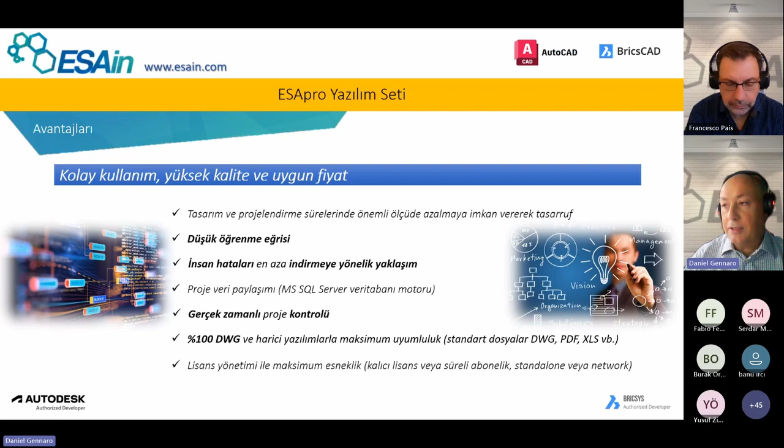I hand over the presentation now to Francesco, who will explain the connection between the different applications and what we are doing with the different applications.

Okay, thank you, Daniel. With this slide, we have an overview of the ESA Pro workflow. Here you can see all the 11 modules that ESAIn is currently providing. In the middle, you have the project database.

That is a Microsoft SQL database. We use Microsoft SQL as the standard engine, so ESA Pro is a good solution also for group work. If you work in a team of 20 or more people, you don't have problems sharing your data. All the modules are divided into three main areas: the process area, the plant design area, and the electrical area.

You start from the P&ID. With the P&ID module, you can create smart P&IDs. By smart P&IDs, I mainly mean a P&ID that is able to generate lists. From the P&ID, you can get the lines list, the equipment list, the valve list, and the instruments list.

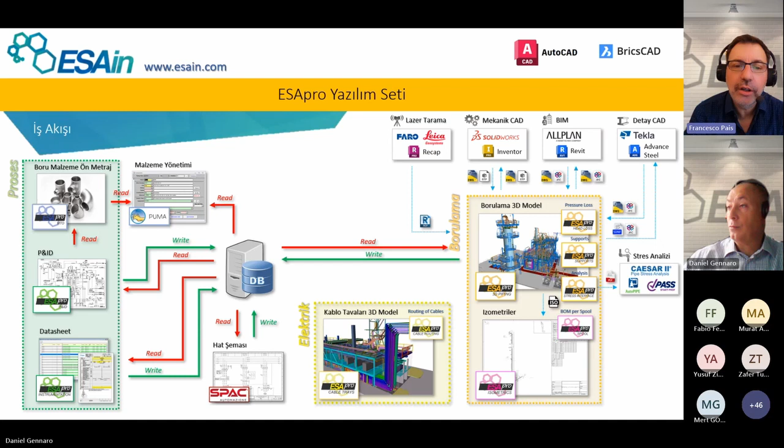ESAPro Cable Tray is a separate module that lets you draw the electrical raceways, so it can be used even if you don't have the piping. If you use AVEVA or CADWorx or AutoCAD Plant, why not? You can open the 3D model and draw the cable trays inside it. You have some default catalogs that can be customized by you easily to add, for example, Turkish manufacturers. We have some international manufacturers, but we can't have the manufacturers of the entire world. But it's easy to customize. At the end, you get the bill of materials, how many cable trays, how many covers and clips, and so on.

We also have an additional module, ESAPro Cable Routing, that lets you read an Excel file with a cables list. It may be a list of cables you want to route with the cable section, the start and the end, and so on. The cable routing module lets you automatically route your cables inside the electrical raceways. At the end, you get a list of how many cables you routed, how many cables you have to buy, and it's very efficient.

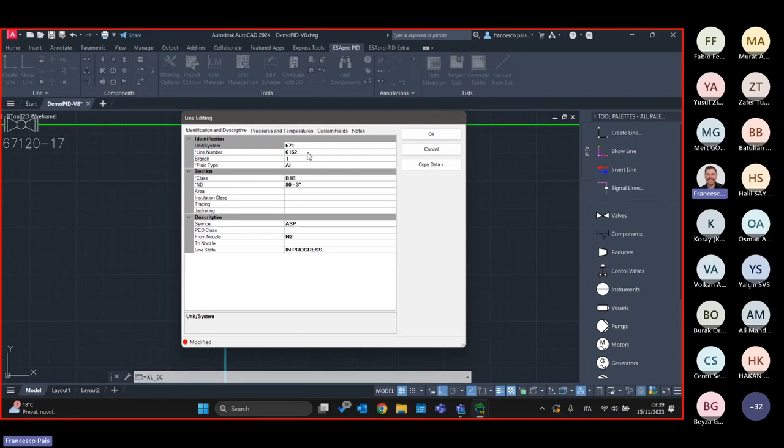And as I told you, these are standard AutoCAD entities. This is a block reference, and this is a line. If you pick this and check properties, you see the standard AutoCAD properties, and the same is for this line. But if you double click on it, you get the line's properties, because this is not just a green line - it's actually a process line with pressures, temperatures, line number, piping spec, size, and so on.

And the same is this - no, this is a ball valve. The size is 3 inches, and I will show you how to fit this information.

When you're finished, you can save your file just to have the file saved. But most important is the data extraction command. With this command, you are publishing your information into the network server, and it's shared with the other modules.

When you change something here, you see the changes in 3D piping. If you change something in piping, you see the changes here. I will show this, okay? But the workflow is this: data extraction is the green arrow you see during the presentation.

Okay, that's fine. And once done, you can generate your tables, maybe the lines list or the valves list. In this case, I'm just generating AutoCAD tables inside the drawing, but all these lists can also be generated as Excel files without problems.

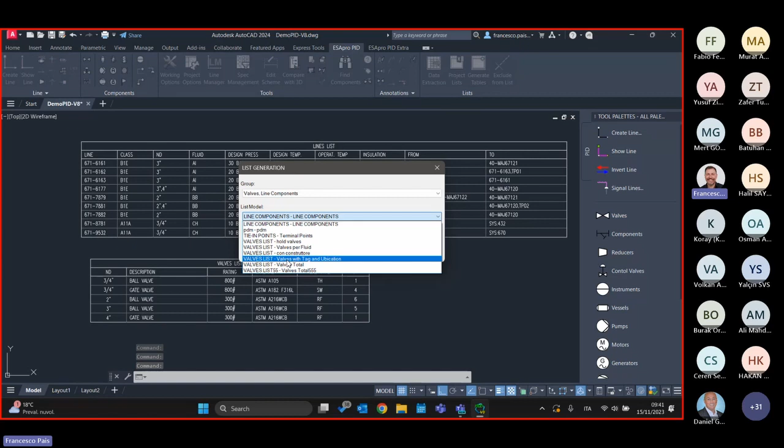It's very, very easy to customize the environment. So if you need to generate this, you can start from here, adding the tag and removing the quantity, and add the ubication. You get this.

And you get also the symbol legend. The symbol legend lets you show only the used symbols.

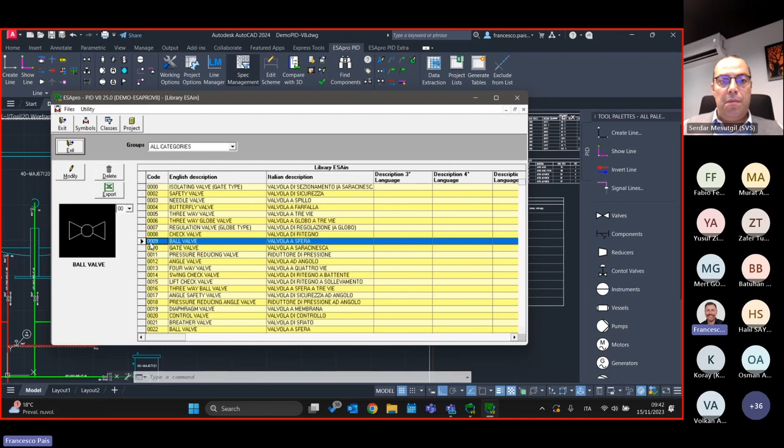Okay, that's fine. This is the final part, but how can we get it? I show you now. We have here an environment that contains the blocks library. The blocks library is a library of AutoCAD files, and each file has a name. If I look into my C drive in this case, or network drive, you will find a DWG named 0009.

Double clicking it, you get the descriptions. ESAPro works managing 5 languages. This means that the Italian description is provided by ESAIn, and so the English description. But if you want to add your own description, Turkish description for example, you can use the 3rd, 4th, or 5th language.

So you can choose what language you want to use for your list. The software is in English and in Italian, but you can use the Turkish description plus an English description. You can have more than one description.

And for each symbol, you may have different graphic representations - a flange version, a threaded version, socket weld, or many others. If your customer is asking you to use a different symbol, it's not a problem. You may have 99 different representations for each symbol, and it's very easy to customize a symbol - it's just an AutoCAD block, so you can create a block and save it into a library, not much more.

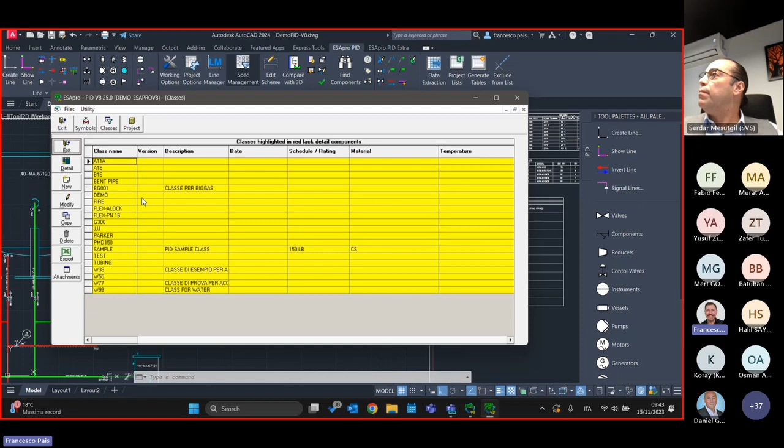And here you have all the categories: the valves, actuators, line components, motors, generators, and so on. But most important is this part, because ESAPro P&ID has a unique approach in this market, because it's a spec-driven environment. This means that when you add a valve over a pipeline, you don't have to specify anything, because the valve is suggested automatically by the software.

And this is because you have a pipe spec environment included in the P&ID environment, so you can create your own piping spec, 888 for example. This could be my spec, and here you can specify the components you usually use, maybe a spec for water treatment plants.

Okay, that's fine. Usually I start from 15, and the highest pipe possible for this spec is 200 or 8 inches. You see the 2 measuring systems, because you may choose what you want to show at any time - maybe metric units or inches - and here you can specify the line, the pipe material, maybe carbon steel.

So it's a very easy environment. You can create a spec in few minutes. For example, the gate valve, I want to use it starting from 80 and more.

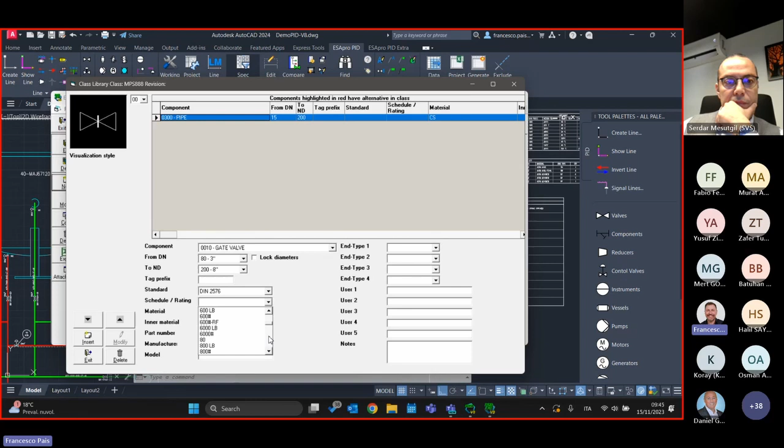In this case, I want to use a standard that is ASME or DIN or any other British standard or any other standard, and here you may specify the rating for this valve. If you don't have this information now, don't worry - you can leave this field blank and add this information 1 minute before you are creating the valve list.

This is because, differently from other systems, the valve properties are not saved inside the drawing, inside each object - that would force you to synchronize your information if you change the piping spec. But differently from other systems, the information is referenced; you can't change the rating of a single valve because it's spec-driven. So if you change the rating in the spec, everything is fine because all the drawings will be updated automatically.

Here you may also specify the tagging prefix, because the software will provide an automatic tag name for the valves - in this case GV, GV1, GV2, according to your needs. You don't have any restriction here. And if you want, you may add the manufacturer model, but in this case that's enough.

I want to have this aspect for this valve. It's a flanged valve, and I want to represent this as a flanged component with a raised face. Insert - for smaller sizes you can insert a ball valve, and so on.

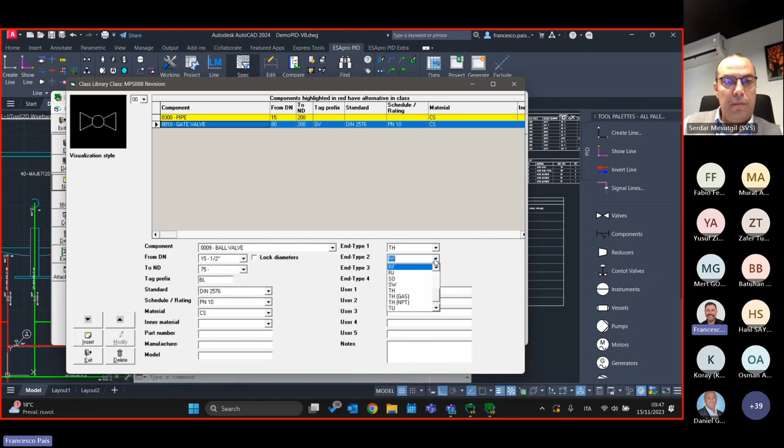I go fast now because you understood the idea - it's spec driven. So the ball valve is used from 15 to 75. The tag is BL, and the end type is threaded, and the threaded is this one, and so on. At the end you get something like this, more or less.

This is a real piping spec that includes only the pipe and the components, inline components and hand valves, not much more. This is one possible workflow if you have only the P&ID.

Another workflow could be: I want to share my piping spec with the piping, and in this case you don't have to create your piping spec in this way - you can reuse the existing piping specs. Using this approach, you have the advantage of managing your piping spec in a unique environment, the piping environment. And when you change something into your piping spec from the piping, this affects the P&ID as well. But if you need a piping spec just for an offer, for example, this could be a good approach.

And in this case you have check valves from 15 to 70 that are socket welds, and from 80 to 200 are flanged, and so on. This is what is under the cover, okay, and you will see how ESApro works.

So just add a vessel here, a block. Here you can type your tag, but if you specify your tag manually and reuse an existing tag - I'm typing the same tag I have in this filter - you get a warning, because you have a duplication check, not only in this drawing but the whole project. If you have many DWGs, it works anyway. Do you want to proceed anyway? We are flexible - do you want to keep this and change this?

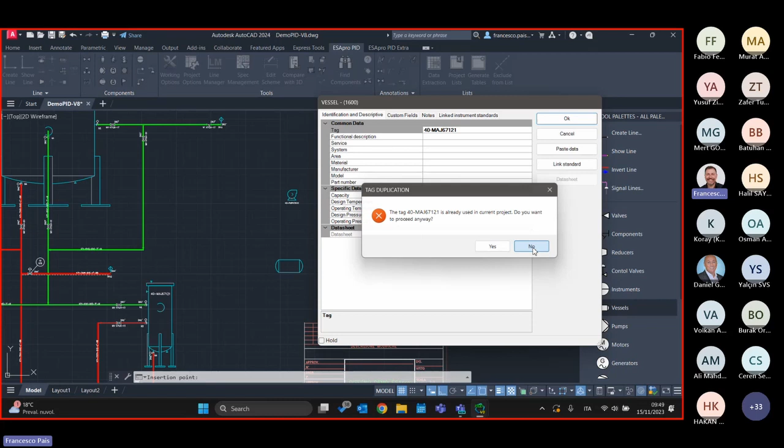You can, but in this case, no - I want to change this. And here you can specify your manufacturer model. If you usually use tanks provided by Storage Equipment Ltd, you can use the paste data function that lets you paste data of your tank directly from an external Excel sheet you fed in, in the time while you need to have a specific equipment. You can add your usual equipment there, okay.

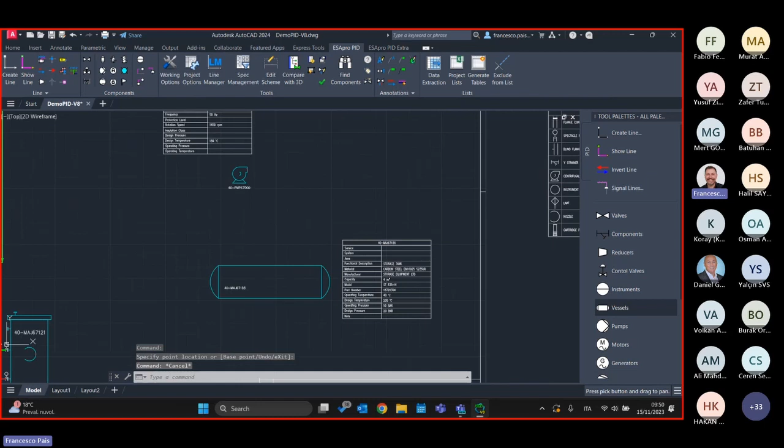Then you can stretch this, and then you can add a table - this, and this table here. With this table you can see the properties of this tag. You can customize this table by double-clicking on it.

ESApro is very user-friendly. You have a standard AutoCAD plus one menu here, and mostly you do things with double click - double click is change properties. What is this? I installed a service pack yesterday - don't mind. Here I change, I create a process line.

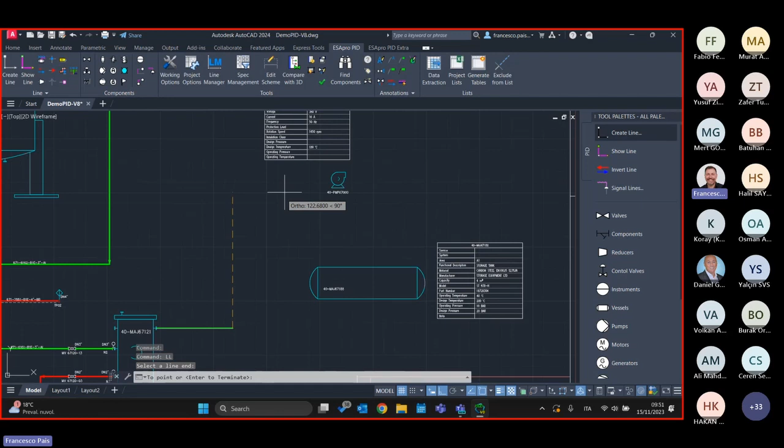My process line is the line number 9700. The line number is provided automatically by the software. And here you can draw your process lines directly as an AutoCAD line. Oh, delete this. Okay, create, continue - I want to use the object snap tracking, which is very useful to keep the alignment.

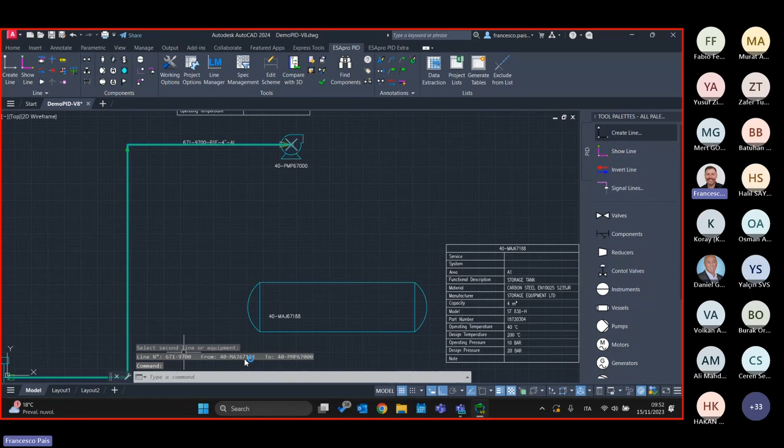These process lines have properties, and here you can see them. This is the tag - you have here an environment that lets you configure the tag. It's just a rule that you can change at any time. So if you want to include the design pressure and the test pressure, and you want to remove another field, it's very, very easy. This is our project setup - you don't have to look through many settings in many different dialogues. You have everything here, and here you can get the connections, from and to. And I continue this.

With continue line, I can continue an existing line number, 671, and then draw another process line here, and I can tag this and this, and another process line here, 02, let's start from here, and going there.

If you want to add a reducer to change the size, double click, and I change the size from 2 to 1. You can use AutoCAD to stretch these lines, or you have this command here that is more useful because it lets you stretch the objects, keeping the alignment points.

Okay, now we are ready to add the hand valves. Spec driven. In most P&ID tools you see in the market, you must choose what kind of valve you want to add. If you are familiar with CADWorx or AutoCAD Plant, in ESApro it's different because it's spec driven.

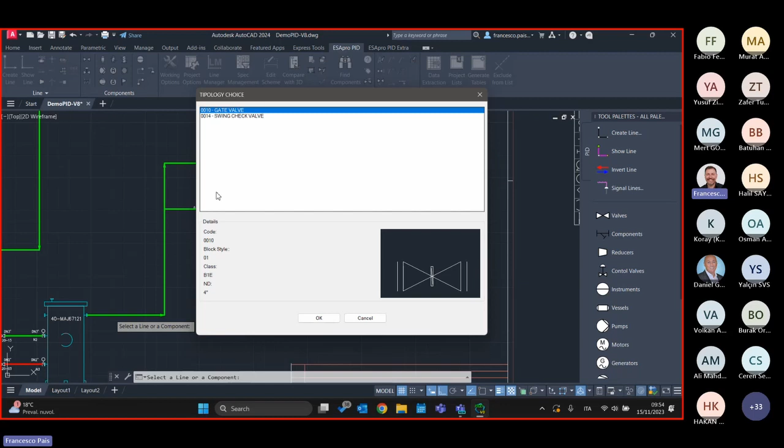So just add a valve. Pick a line here, and the software will suggest the right ones. Is a gate valve, good, or a check valve, just these two, because they are compatible with the spec. And when you add this valve, the line is cut, and you get all the information from the spec. You can't change this on the valve because it's spec driven.

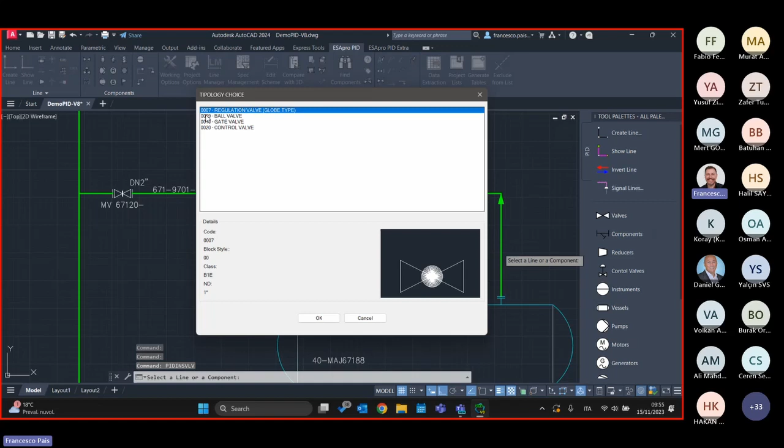If you want to add or change something, you can manage this in the spec. As you can see, this is a flanged gate valve, and this is a socket weld valve, according to the spec. If you don't want to use this, you can replace it with a ball valve. In this case, I'm adding a ball valve here, a ball valve here. If you try to add the valve here, you're locked because it's not compatible with the spec, and so on.

And when you change something, the valve will be updated accordingly. So I change this from 1 to 2, and you get this that becomes flanged. But if you change this to 4, you get a warning because it's out of spec, so you must replace this. So with this tool, you are sure that everything you are doing is compatible with the spec.

If you cut and paste one P&ID into another, you get a spec check that lets you have the compatibility. The valve is not tagged yet.

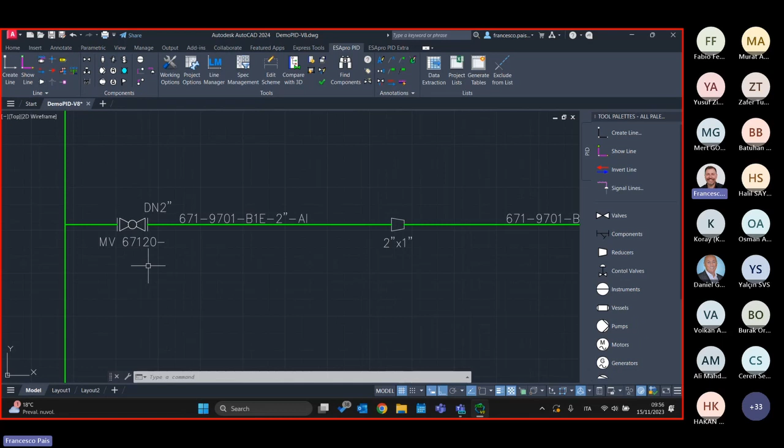You have a prefix that is up to you. In this case, it's a real project, so the rule was that every valve is tagged as MV, manual valve, but the software will add a progressive number, looking for the last used, 41, 42, and goes and proceeds.

Once done, you save your data, and all the tables will be updated accordingly. So these are the new quantities and the new tags. If you want to look for a specific tag, this one, find 42.

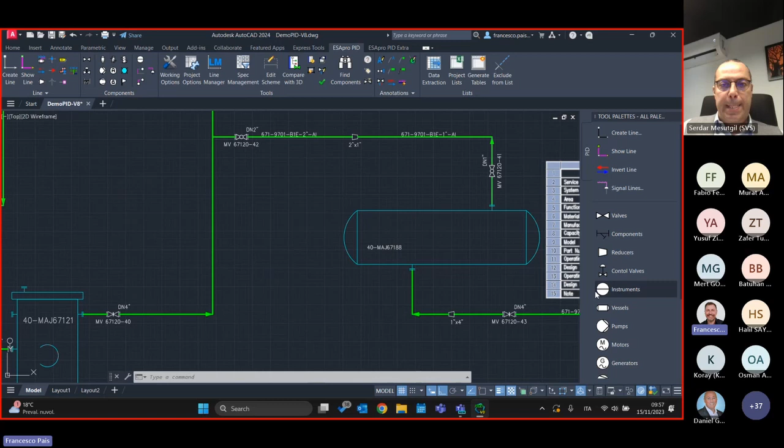Okay, it works. The last part is the instrumentation part, because P&ID stands for piping and instrumentation diagrams. We work with two possible standards. The most used one is the ISA standard, circular instrument, but we also support a German standard, the KKS standard, and it's a standard configuration. It's just a switch you have to specify in your project if you want to work with ISA or KKS.

For example, I want to create a loop to manage this vessel. I attach an instrument here, creating a level controller and transmitter. So I generate a nozzle. Here you can specify the instrument type, LIT. Location is 88, okay, is fine. And this is the loop number.

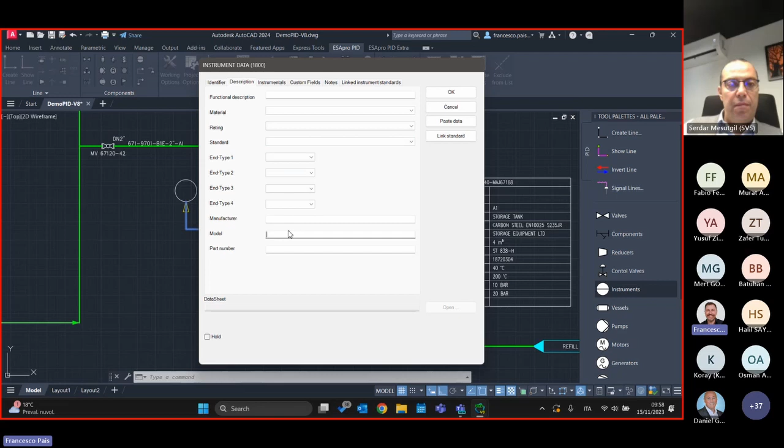Here you can specify the manufacturer, the model, and so on. Or with paste data, you can pick this and get the usual instruments you want to use. In this case, you don't have to specify anything into your data sheets because you are filling your database. But if you don't have this information, don't worry. When you have the data sheet, all this data will be fed automatically by the data sheet.

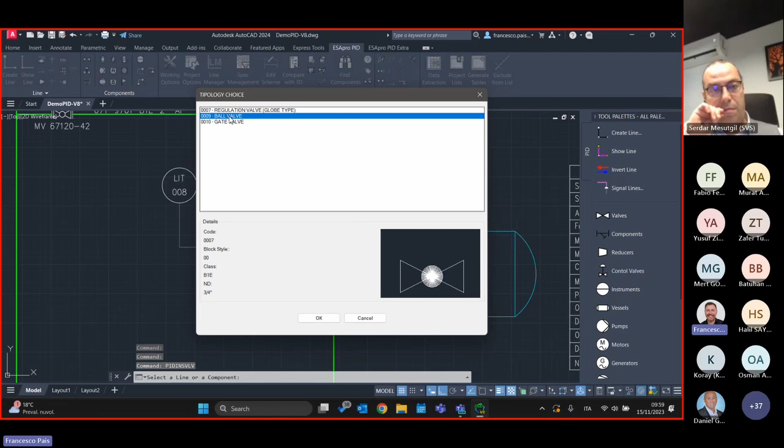And here you get also the range, the IO signal, very useful now for the electrical designers, and so on. Then this is an LIT. I can stretch it. I can add a valve here just for dismounting it if there's a fail. Okay, this is a new valve, so I can number it, looking for the last number used.

This instrument sends a signal to another instrument that could be a discrete instrument. In this case, it could be a DCS. The loop number is the same, and this could be the controller. It's discrete, so the location must be typed manually, LC 008. And here you have your signal lines, maybe data link or pneumatic, or in this case, it's just electrical, the analog signal 4-20 milliampere.

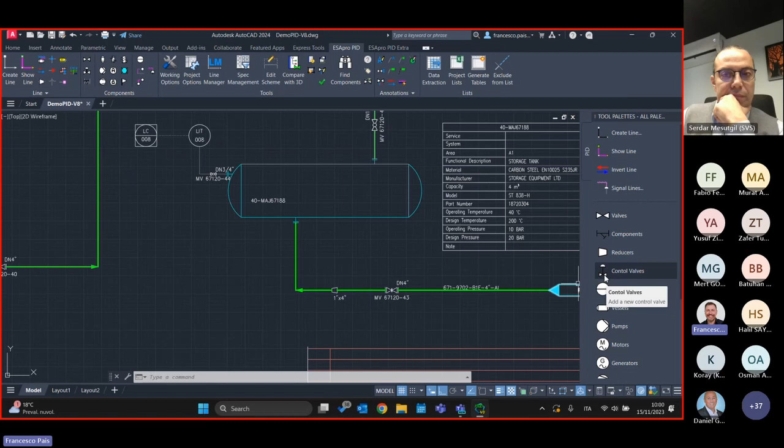The controller will control a control valve, a regulation valve. So with this command here, you can combine any actuator, which is an AutoCAD block, with any base, could be standard or just a ball flanged with pneumatic controls, with spring return to have an intrinsic protection.

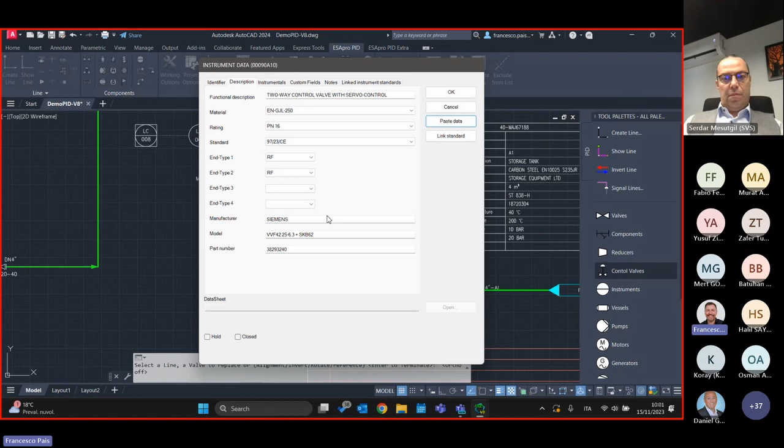Picking here, I get the balloon. What is this? This is the LV level valve. And here you can specify the materials, rating, manufacturer, and also in this case, I want to use a standard valve for me, a Siemens valve, two-way control valve with servo control.

And here you have all the information, the intrinsic protection, the IO signal, and so on. Once done, I can close this, and that's it. I save this.

Okay, and then if you want to get an instrument list as an Excel sheet, you can select all the drawings you want to get. For any drawing, you can select the revision you want to get, because one thing I didn't tell you yet is that ESAPro is able to store all the previous revisions into the same database. So you can get a previous revision at any time, or you may compare between the two.

We'll show you this is a killer feature of ESAPro. This feature is also available in 3D piping. This means that at any stage you can match between revisions to see how much materials you have more or less, comparing it with the previous revision.

Okay, in this case I have just revision 0, generate list, and this is the final result, with all the instruments.

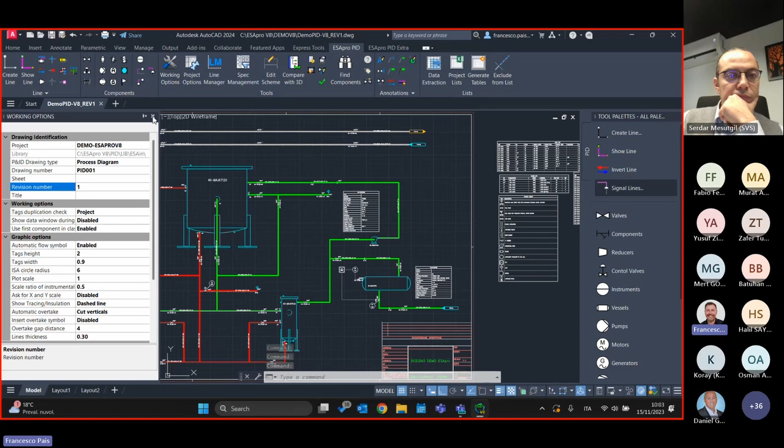But if you want to create a new revision, you have just to open this, save it with another name, maybe this one, revision 1. You have just to change the revision index here in properties, and then you can change something.

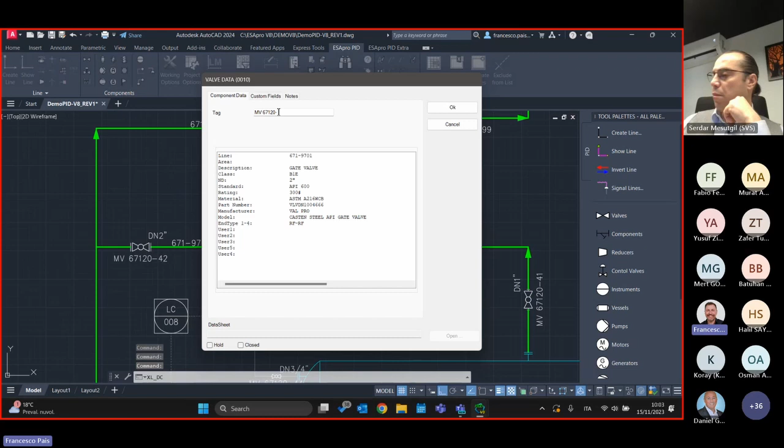Okay, I want to delete this valve. I want to add a new valve here, maybe a check valve, and I want to name it as 99. And then I want to change something here, add a new valve here. No, the size is the same. Just add the new valve here, and this is number 66, just to be able to recognize it.

So I deleted something, I added a new item that wasn't present before, and I changed the quantities in this case. Data extraction: you get a notification, and ESAPro tells you, understood, this is a new revision of this document. So you are not changing revision 0, but this is revision 1.

And at this stage, I'm just saving the previous data into the backup area. You will see. Okay, then this is my current revision for the whole project. The current revision that all the users of the team are watching is revision 1.

So if I get the valves list total, this is the current revision as an Excel file, revision 1. But if you want to get revision 0, you have it. This is revision 0.

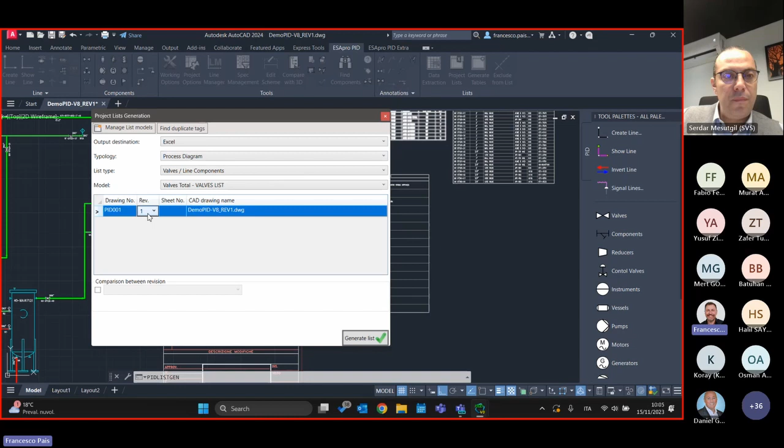But most important, you can match between the two. So revision 1, comparison with 0. And here you get the quantities. With this column, you have the current quantities. On this column, you have the previous ones. And here you get the differences.

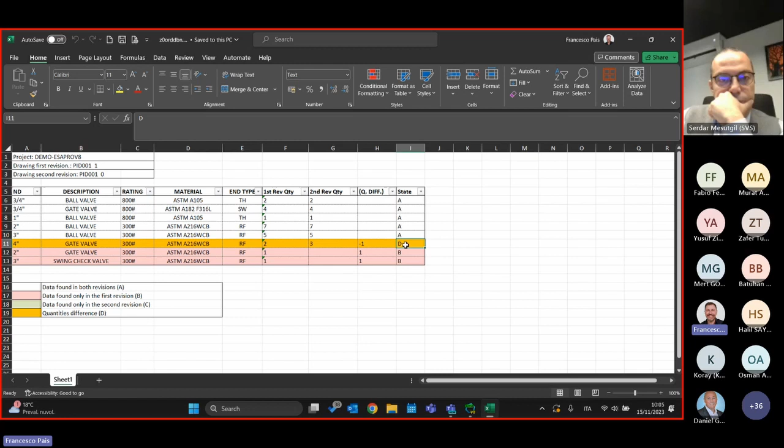Minus 1, plus 1, plus 1, and with a letter that shows you the state. Okay, A, nothing changed. B, new items. And D, difference in changes. Okay, the same is for the tags.

Comparison. Okay, these are the new items, and these are the deleted items.

That's fine. Let's close the ESAPro P&ID part. So with ESAPro P&ID, you're able to create a process scheme and get the first list, lines list, equipment list, valves list and components list in an easy way. It's very user-friendly. At the end, you get a standard AutoCAD drawing.

The next step is 3D piping. I will do the same thing I made in P&ID in 3D, showing you the interaction between the two.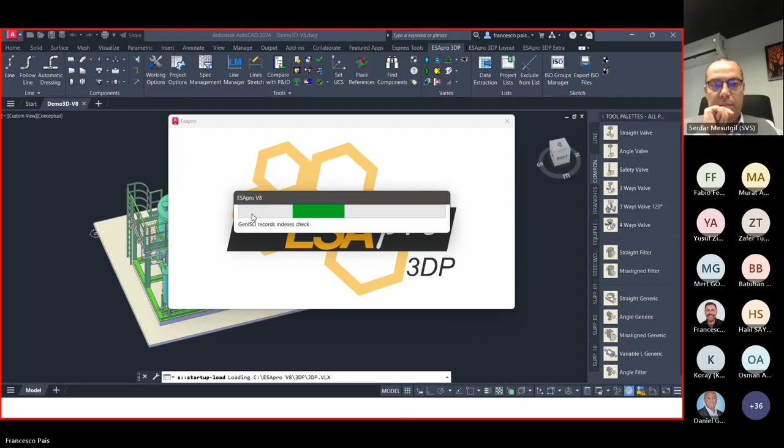This is a 3D model made by ESAPro 3D piping. I will show more examples with bigger plans. It's just a small model I use for the demos. It's a real project, but it's just a small part of a real project. And as you can see, 3D solid.

These equipment were made by ESAPro. This pump will be imported as a step file, but is a standard solid. The first thing I want to show you is the compare with P&ID command.

With compare with P&ID, I have a browser that shows you all the objects you already have and all the objects you don't have yet. In white, you see the objects that are missing. Here you have all the P&ID drawings in your project, and the green items are the ones you already have. In this case, I have the pump, but I don't have the vessel yet.

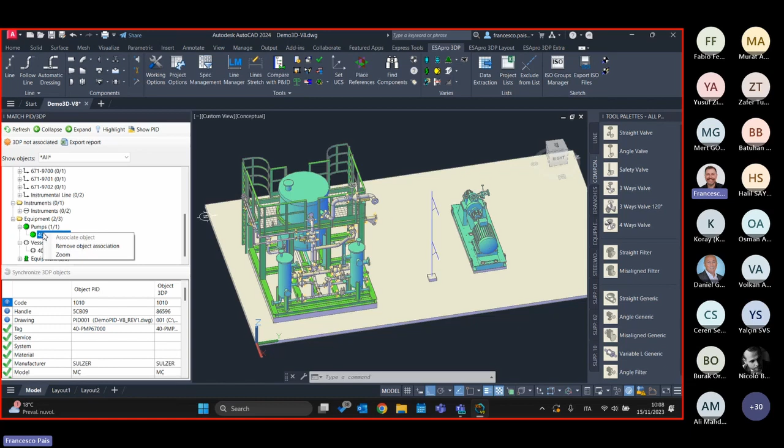If you want to see where this object is, you can highlight it, and you also have the possibility to show the P&ID. In this case, you have a floating dialog that lets you find the object directly in this window. You may also disable the original colors, and you will see everything in green for things you already have, and in gray for things you are missing.

But what if I have a mismatch between the two? Imagine you have changed something in your pump, from the P&ID or from the piping, doesn't matter. If you double click here and change something... As you can see, you get a mismatch color, a red alert.

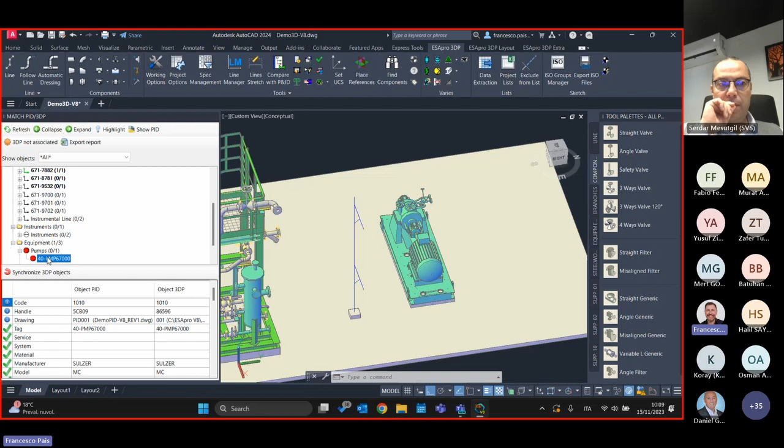You have the same feedback in your P&ID. This means you have a misalignment between the two, because you changed something from the P&ID, from the data sheet, from the electrical environment, but some data are not the same. Here you see the differences: the area, in this case, you have a value here and you don't have the value here. You see this also in the scheme.

So you may choose: do I have to synchronize the 3D object according to the P&ID, or do you want to synchronize the P&ID according to the piping? In the perfect world, you have a P&ID that is up to date, and the piping comes later, so if you change something in the P&ID, you must change the same thing in the 3D piping. But in the real world, sometimes you have to change a thing in the piping first and then in the P&ID.

So you have the same synchronize button also in the P&ID. You can't synchronize the P&ID from the piping automatically, obviously, because the process engineer needs to have knowledge about this misalignment. But in this case, I want to accept this because it's just mistyping, so I want to synchronize back. If you have a red sign, you may choose who needs to update the drawing with the synchronized object.

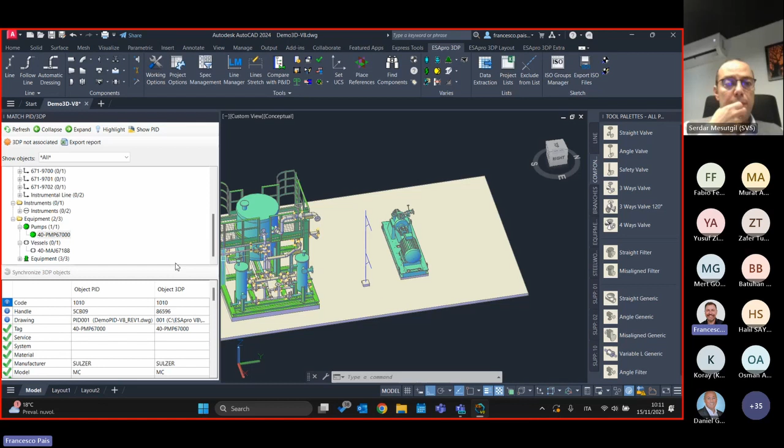Okay, I want to add a vessel now. I want to draw this vessel using ESA Pro. Let me resize this browser, it's good. Equipment, vessel, and here you may choose what kind of vessel you want to create. The size... 1,400. Yes, this. And now I have a new vessel.

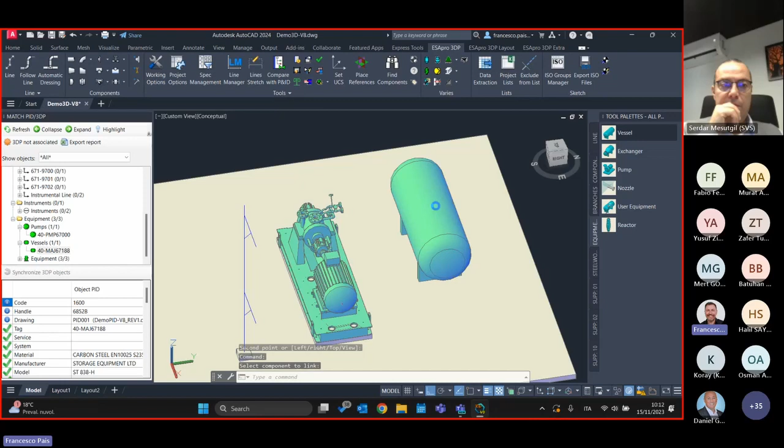I don't have any information about this vessel, but I have information on this vessel that comes from the P&ID. So you don't have to type anything here, just pick this and associate object, and it works. This is the way you may link two objects.

Okay, then I go on wireframe. Here, 400. Okay, one nozzle, 1 inch.

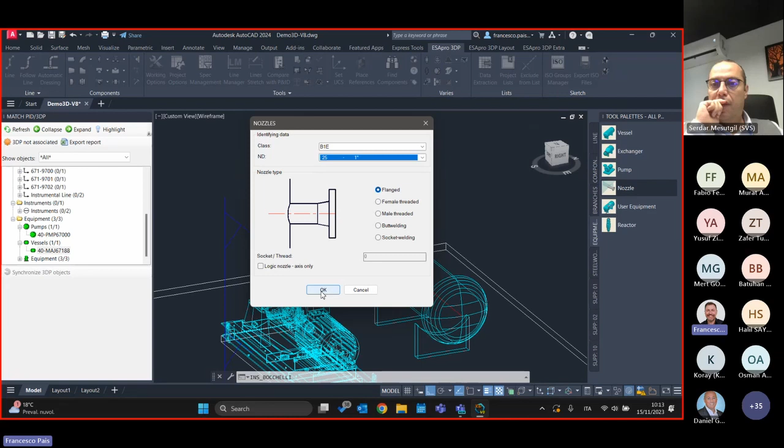I'm using the same piping spec I used for the pipelines, and I will show you the piping spec environment and the catalogs. It's very easy to manage. Believe me, it's not difficult to create a new catalog or new components, but you have many standard catalogs provided out of the box. You can draw a nozzle starting from here and specify the direction. You don't have to specify the nozzle position through strange dialogues, you just have to draw it.

Maybe 800, and I want to turn right 400. Okay, double click. And 1, this is the nozzle number. I don't know why I didn't have to install the service packs yesterday, but Windows service packs... don't mind, it works, it's just a warning.

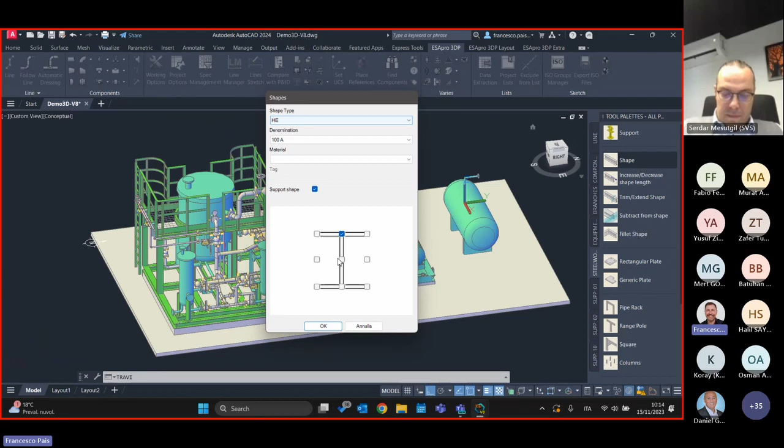Then you can draw your pipeline, but before creating the pipeline, I can add some steelwork. With this command here, you can add beams, pipe racks, range poles, or many other things. You just have to select the shape. You can customize the catalog if you want to add different standards. The alignment point, and then you have to pick two points: this point and this point.

And with a line... okay, with line, and then adjust and rotate.

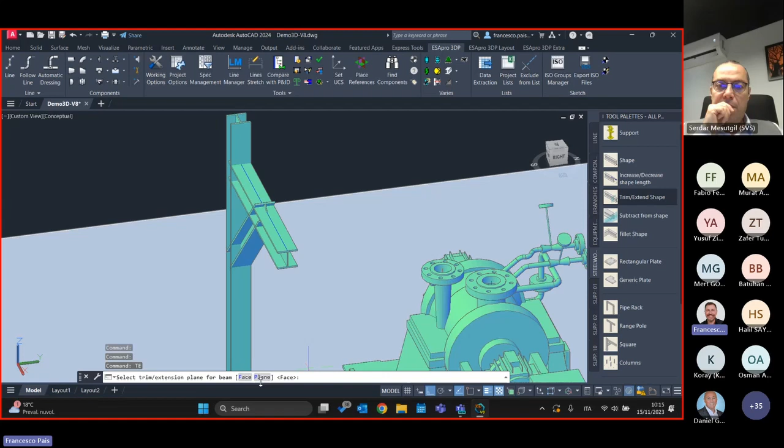So I drew some beams, but they are actually 3D solids, so you can use the standard AutoCAD Boolean operations to interact with them. But we provide a set of specific commands that let you cut interferences, trim, and extend your shape. You can pick just a face and cut this, it's like the AutoCAD slice command. If you're familiar with 3D AutoCAD modeling, it's just the slice command. 3D orbit.

Okay, and just slice this face here. This is to avoid interferences, because we have also the interferences check here. If you leave this, you get warnings from interference check. This is a standard feature for beams, but you may add racks,

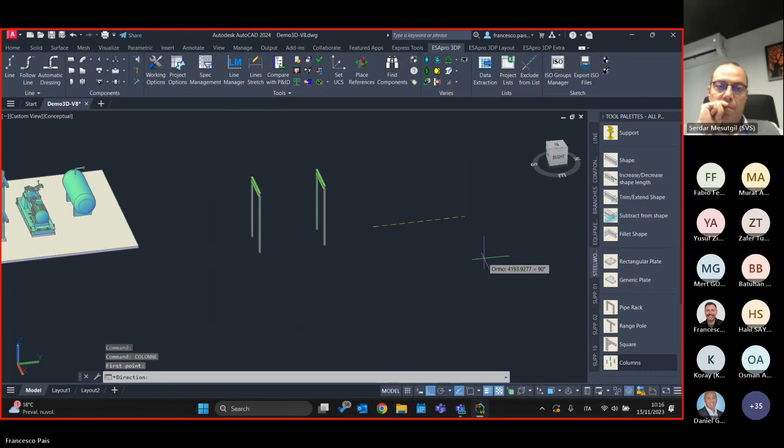or columns. You can add grids. Just the basics, not Tekla, okay, but just to have an idea now, an overview about what you need. I start from here, pick point, draw a circle, and then I can draw a grating. All these features are included into the 3D piping module, and then you can add your railing.

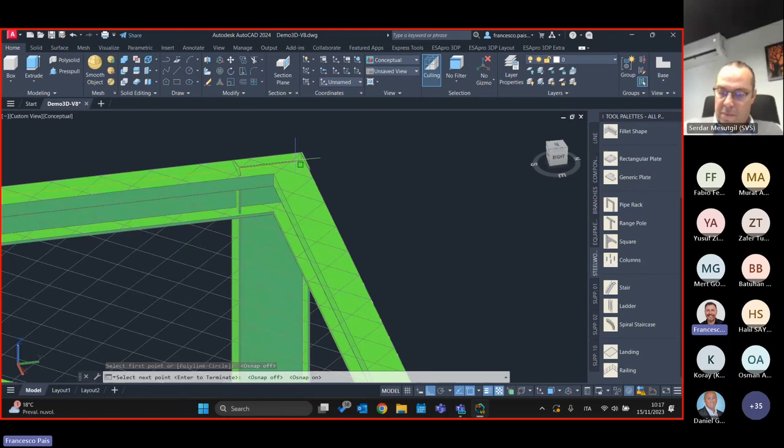Just pick this point here and the object snap here and object snap here, just to have something to work with. And I can add a stair with railing. Okay, and then you can move it easily, no?

From this point, end point of this, to end point of this, F8. Okay, end point of this. So this framework was made using this feature. We have also the ladders, the spiral staircases, and at the end you can count how many beams you have.

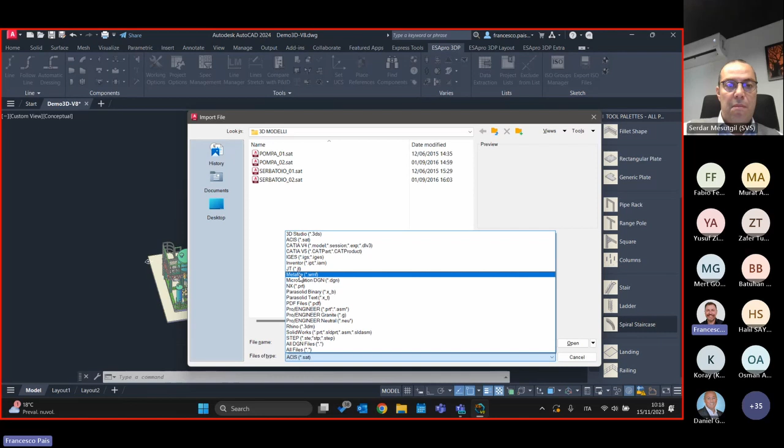We are ready to perform the piping. We can also import an external file for equipment. Could be from Creo, from Inventor or SolidWorks or any other. In this case, I'm just importing a SAT file or a step file. It's the same. And any geometry imported can be converted into an equipment.

So this is a vessel. This is not yet a vessel, but I can convert this into a user equipment, attaching the data. This is TK002. Okay, that's it. We are ready.

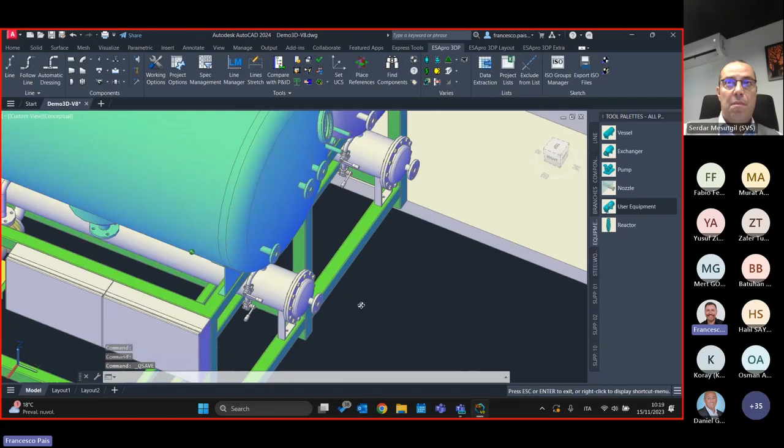We can work directly on this nozzle. I can draw a pipeline. For example, this B1E, the spec 1 inch, and then I can catch this point with AutoCAD center snap. Okay, F8, and you can draw your pipeline directly from here without any restriction.

You want to add a flange? Okay, you can add the flange here. And if you want to add a valve, spec-driven, no? The valve is suggested automatically by the software. Okay, this is, you are in AutoCAD, so you can change your object easily.

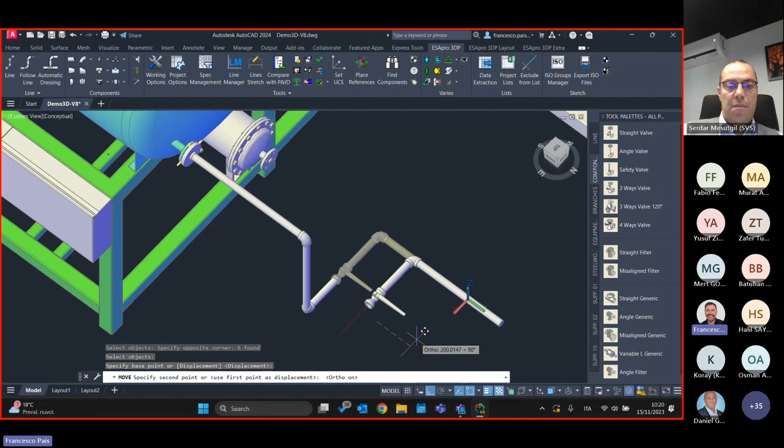For example, you can move them here. If you change your mind, you can delete this, delete this. Okay, you can draw an axis, continue line from here to there, and you can dress this line.

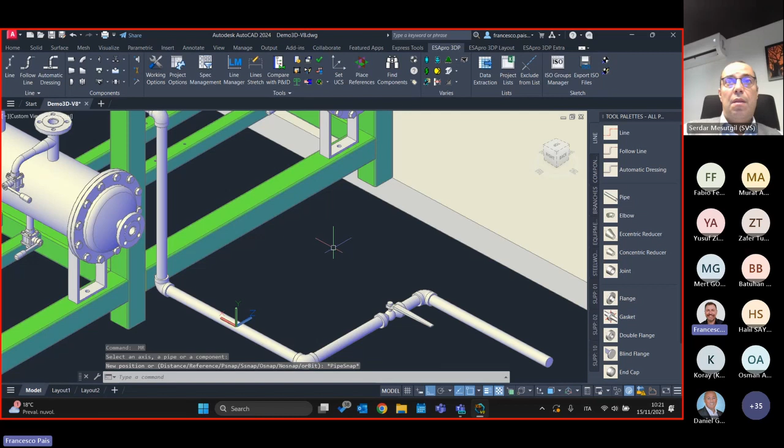So you are very, very free now. Okay, this is a pipeline. You can stretch it also using the same command I had in PIDs. So you can stretch this here, or just move this here. Very, very easy. But now I want to continue my PIDs.

So I have this line number. I want to draw this line in my piping, this line here, 9,700. It starts from here and going there and adding this valve. It's good. The line is not drawn yet.

I want to draw this line. I'm using the same line number that comes from the PID, so I have the same process data. I pick this point, and I have just to pick the distance if you want, or with the connect option, you may pick this, and you have an automatic routing function.

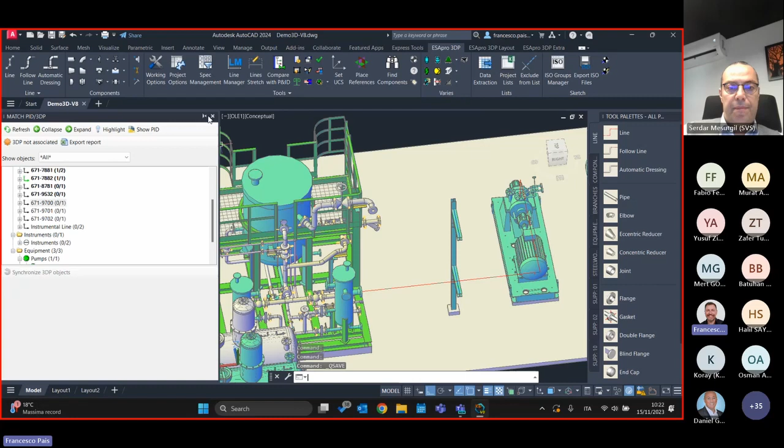And in the meantime, the software is looking for possible clashes. The yellow pipe is just for clashes. Press enter, I don't know why. Just a moment, I want to close the drawing. Yes, and reopen it, or just close the piping and reopen it.

I don't know why I have so many warnings. Sometimes, you know, the best practice in AutoCAD is close and reopen. Oh, good. Okay, that's good. And then I want to launch the automatic dressing function.

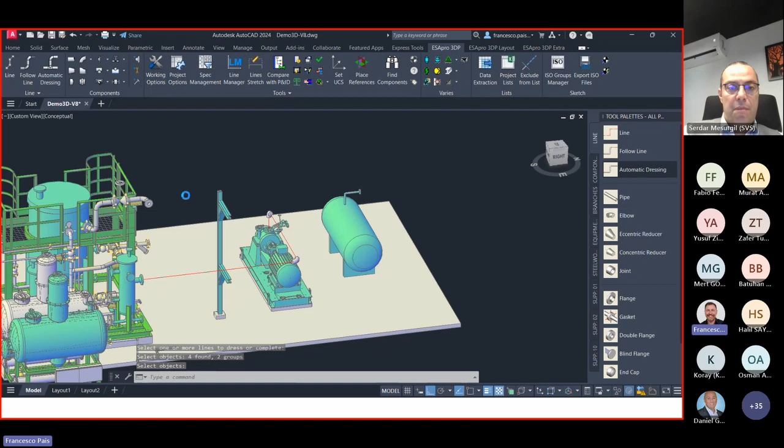And according to the spec, you get the elbows, the pipes, the flanges. And this is a 300-pound flange. And this is the gaskets with the bolt set. But the line is not complete yet, because I need to add a valve.

It's drawn because it's bold, but it's not green yet, because here you look at the branches, I have this valve. Okay, let's add this valve here, the gate valve. You can rotate this angle 45 from this side and specify a distance to this point.

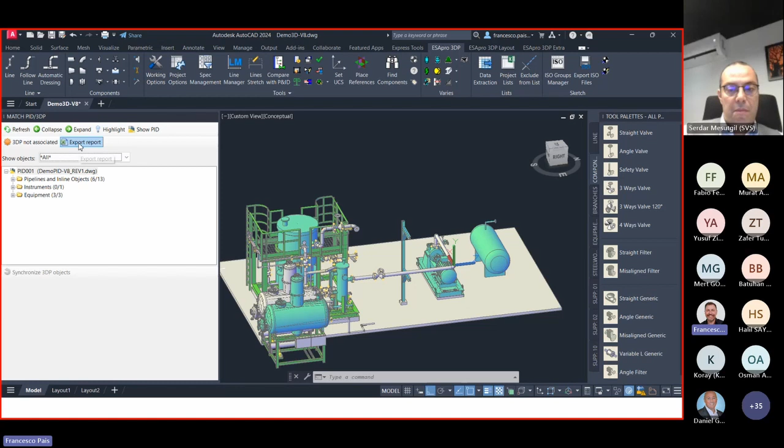How much is 1000? And the trick is the same. Link, and that's it. So here you may filter, no? What I need to do, what I did, what is mismatched. Okay, you can get a report in Excel that lets you have an idea, and then here you can

draw another pipeline with a guiding path. In this case, I want to start it from here, go in there, and keep the same alignment of this pipe, for example. Or if you prefer, I want to avoid some obstacles. The approach is this one.

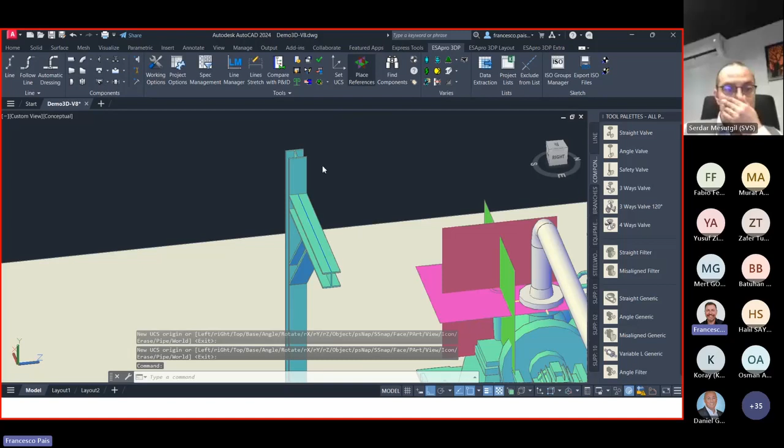You may use this icon as the reference icon symbol that lets you catch some reference points. Could be this point and this one, or a point at a specific distance from this one, maybe 400 and 100 more. This is my reference point.

Once done, you can hide the parts you don't want to show. Hide object, for example, all these objects. So you can clean your model and work into an empty environment, but you're sure you're not clashing into any obstacles, because you have this as guidelines.

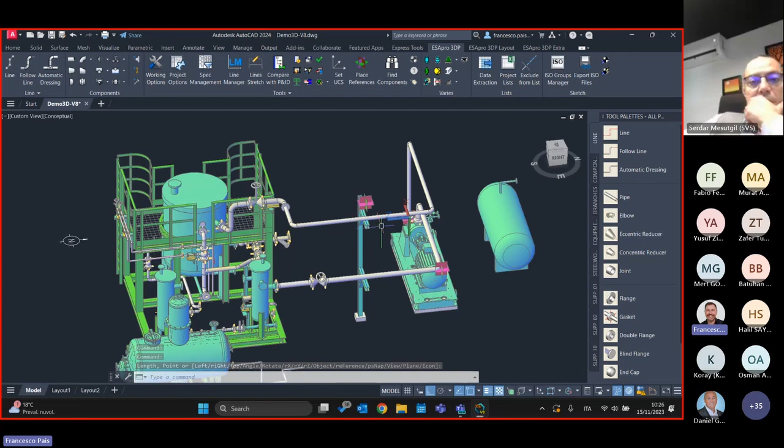So continue line here. You may specify 2,200 and more, or just pick this plane, and then you can pick this plane, and this plane, and this one. Very intuitive though, you don't have to worry about how much it is. You can just pick the plane, and the standard solution is provided as an orthogonal direction, but you may also specify the angles. Okay, and close it.

Or you can draw your pipeline as usual, just specifying the dimensions, but you may switch your ortho mode off. So when you switch ortho off, you work in slope mode. If you need to create a slope, you don't have to worry, you just switch this, and specify how much it is, or the inner angle, as angle or percentage.

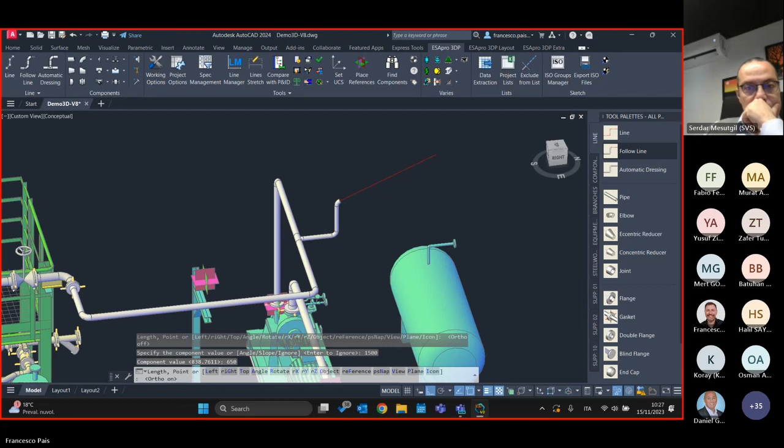It's up to you. This is 1,500, and this is 650. Okay, the slope will be recalculated, and here you get a cutback elbow.

You can stretch this, and when you change something, everything is updated accordingly. I can add the flange here, add the valve here.

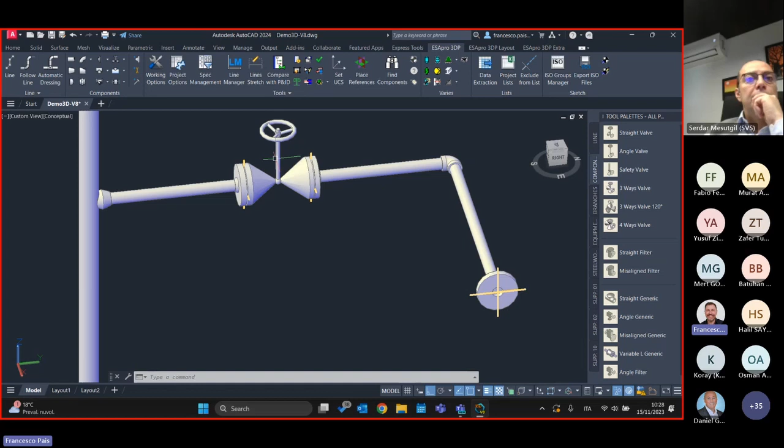If some of you are familiar with AutoCAD Plant, I will show you something AutoCAD Plant is not able to manage. In this case, for example, I change this size from 2 to 1, and everything is updated correctly, from butt weld to socket weld, from welding neck to slip-on, and you don't have any drop symbols or problems, because ESApro is able to manage all the changes easily.

And here you have the standard catalog. So you have all the catalogs with a hierarchy, with the pipes, elbows, branches. For example, if you have the valves, you have the straight valves, and here you have all the components provided in the catalog.

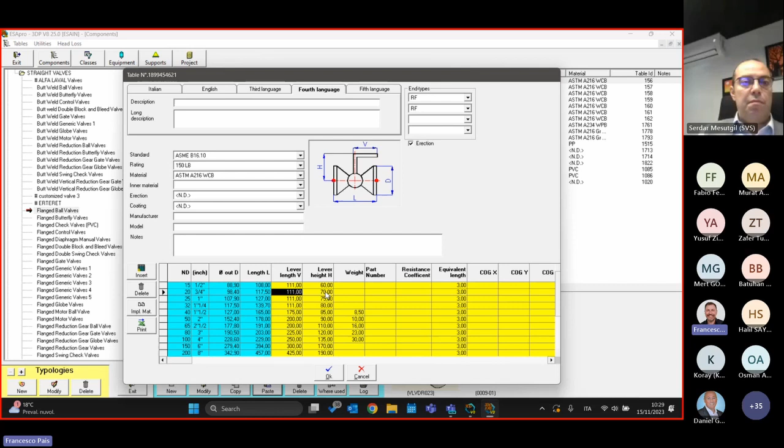The Italian description - I want to show the English description here as the first column. Better. And here, for each object, you can copy and paste this table to change the dimensions. It's very easy because you only have to provide the mandatory dimensions, which are the blue fields. The yellow fields are optional dimensions, and you can change your description, your hand wheels, and so on.

And here you can create your own spec - my piping spec 777. And here you just have to pick the object. Very easy, just the pipes, butt weld elbows, and socket weld elbows, for example.

And for any object, you may pick here the pipe you want to use. Okay, English description first, here, schedule standard pipe. Schedule standard is this one, from 15 to 200. And here you can include the schedule standard elbows, this one.

Long radius, only from 3 to 8, because I want to include socket weld elbows for sizes lower than 3. Pick this - the standard sizes are automatically added by the software. And here you may choose if you want to show inches or millimeters as nominal sizes.

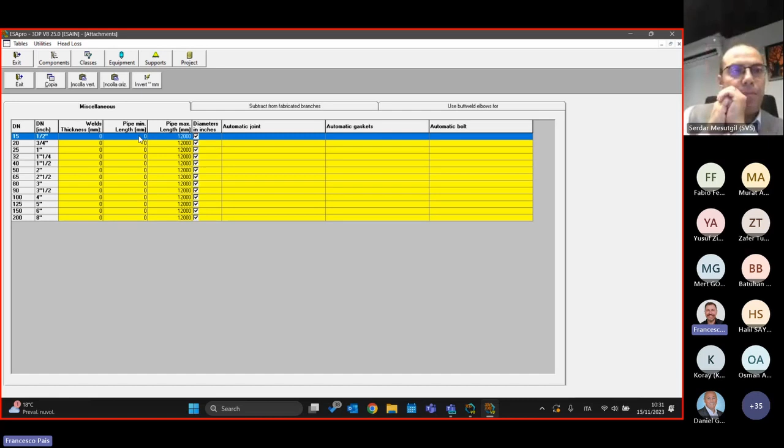This is the maximum pipe length. If your pipe is more than 12 meters, you have a joint, which could be a welded joint, or a half coupling, or a flanged joint, and this is the minimum pipe length. And the weld thickness - how much is the weld space? If you look at the model, you see you have the weld space here, and this comes from the spec.

Launching the data extraction, you can perform the bill of materials, and get an Excel file with the components BOM with all the materials together.

You can configure this output, adding or removing columns according to your needs. So if you want to know how much pipe you have here - but if you want a better idea, you may add, for example, the line number as the first column, and you have your material divided per line. In this case, you have 14 meters.

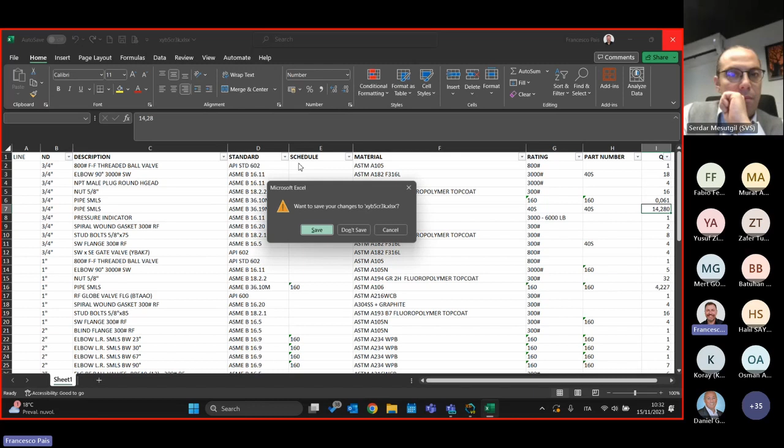Okay, but let's see what happens if you select this with the line number as first field, and you look just at the pipe.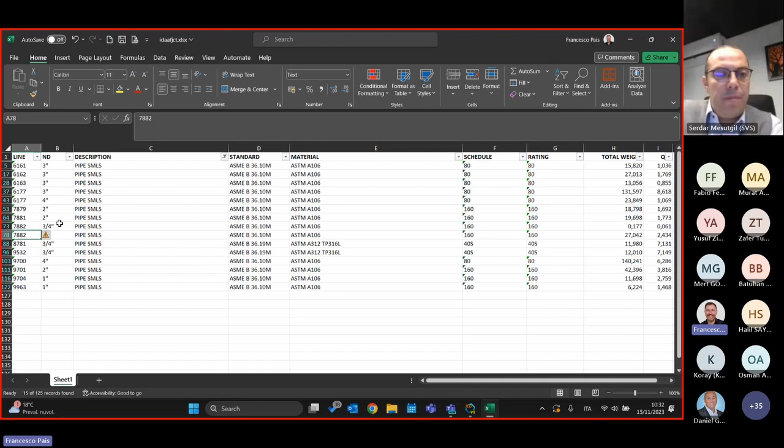You have the quantities divided per line and per size. If you have more than one size per line, you get how much of each. The software is very flexible because according to the output you want, the quantity changes. You can have material per area, per fluid, per drawing, or with any criteria.

You can also get the beams with total length, total weight, and total surface for painting. The insulation - if you have insulated lines, you can get the insulation list to know how much insulation you have. The insulation is also counted for clash detection.

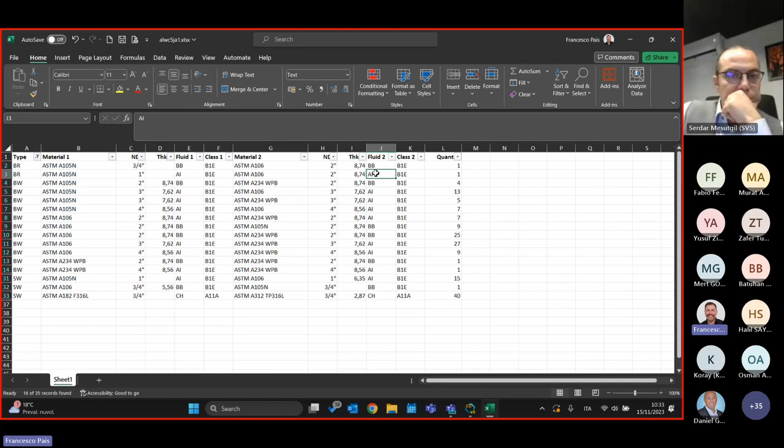And the joints, very interesting - you can get how many joints you have: branches, butt weld, and socket weld connections. They are divided per size, per material, per thickness, and so on.

The last step in piping are the orthographic drawings. What you saw until now were standard piping 3D functions.

So you can create a new layout. You're just managing standard AutoCAD viewports. This is a front view. You can also create a section view.

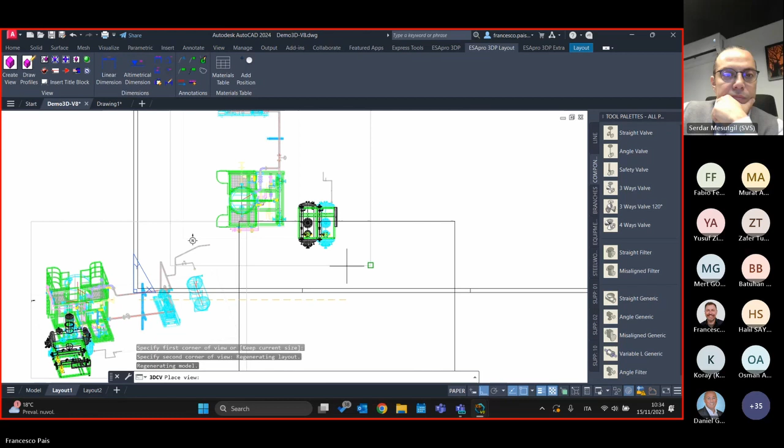And a model view - yes, this is the 3D model. Here you can create flat views, monochrome views, or colored views. It's up to you.

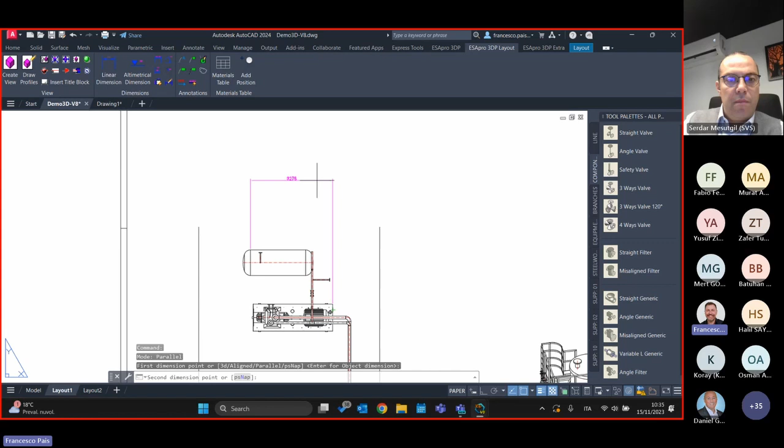Save - you go to the layout environment, and this drawing is made by lines. You can export it and give it exactly as it is to your customers. Here you can add the overall dimensions with AutoCAD or the tags.

For example, you want to show this and this, or the line numbers - for example, here I want to show in working options not the component tags, but the line tags, and that's it.

Finally, isometric sketches. We don't use Isogen; we work with a proprietary environment that is very flexible.

The first interesting thing is that you may choose to combine your sheets as you want. In Isogen, you have a number of sheets that depends on Isogen - you don't have much control over it. In this case, you have a sheet splitting function that is managed from the piping.

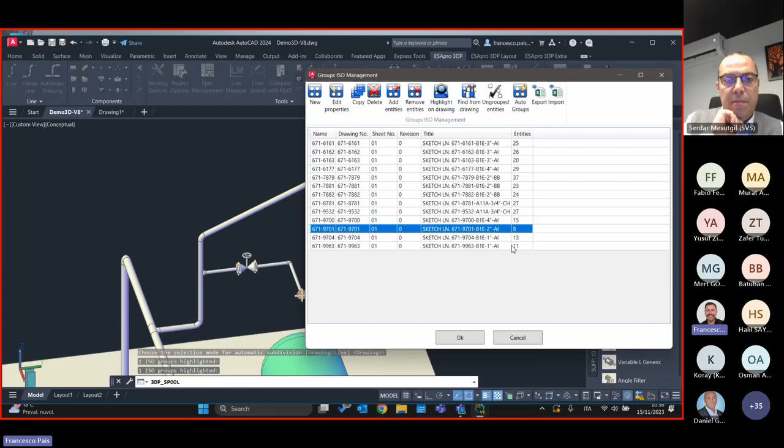You have just a suggestion, and here you have all the sheets suggested by the system. This is a line number, and this is another line number. So you have different sheets, but if you want to combine them together, for example, if you want to combine this - highlight this one, okay, this with this one - you have 8 objects here, and you want to add this object into this sheet.

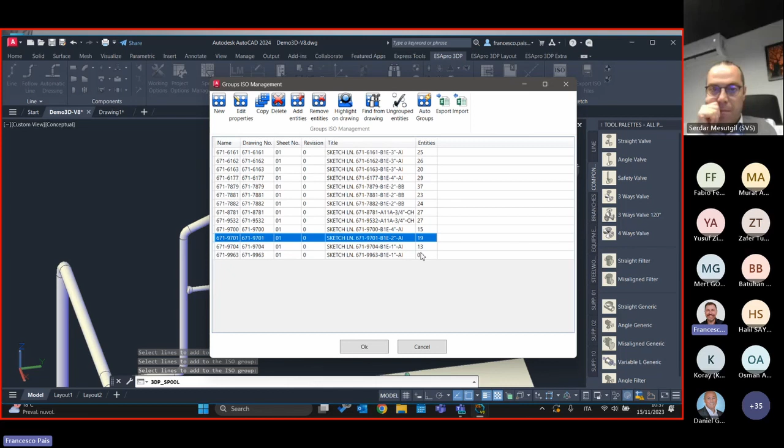So you can add entities, pick this, and now you have 19 objects in this sheet. This is your intention, and ESAPro respects your intent. You can delete this - okay, this sheet is not useful anymore, and your intention is kept.

So if you add a valve here, you continue to keep the same sheet - 25 objects. Once done, you can export your ISOs.

These ones, okay, write files - with this function we create ISO files. The ISO file format is a proprietary format of ESAPro. We don't use the PCF; it's our own format.

The ISO file will be read by ESAPro Isometrics - this is the third module we'll see, but it's very fast because it's just automatic generation, it doesn't take much time. And we close the live session just to give you an idea not only about what ESAPro is able to do, but how it works in real time.

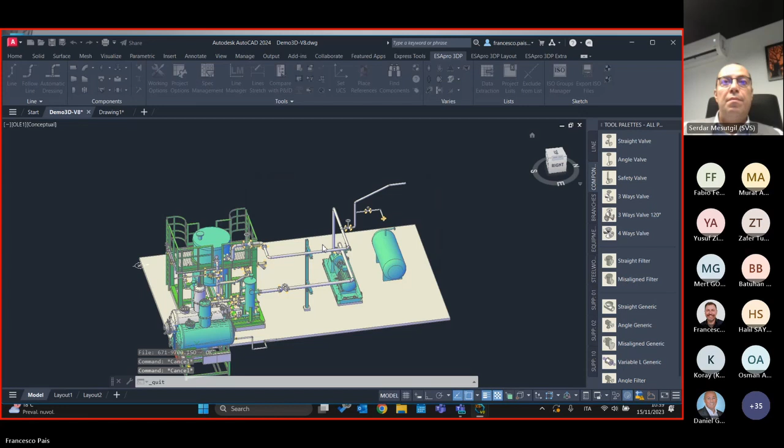Close this, and then launch ESAPro Isometrics. This is an additional application - you may have just one license of piping or three licenses of piping and just one of ISOs. Then launch four ISOs.

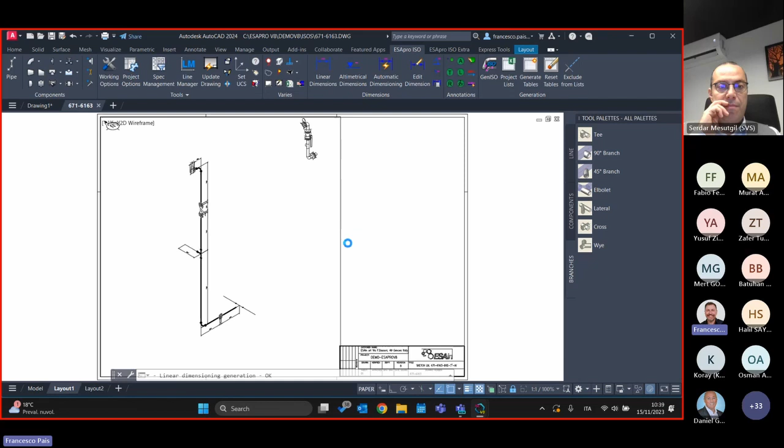This is one sketch. You're watching in real time - they are creating, we are creating the ISOs in real time. On the upper right corner, you see the 3D preview of this line, very useful to understand the ISO. And you have the dimensions, the balloons, everything you need.

You can customize your title block - this is just an AutoCAD block. The ISO is an out-of-scale representation. It fits the title block regardless of the number of pieces you want to add to it.

And this is line number 9700, the line we drew in the P&IDs. This is the real look of this line.

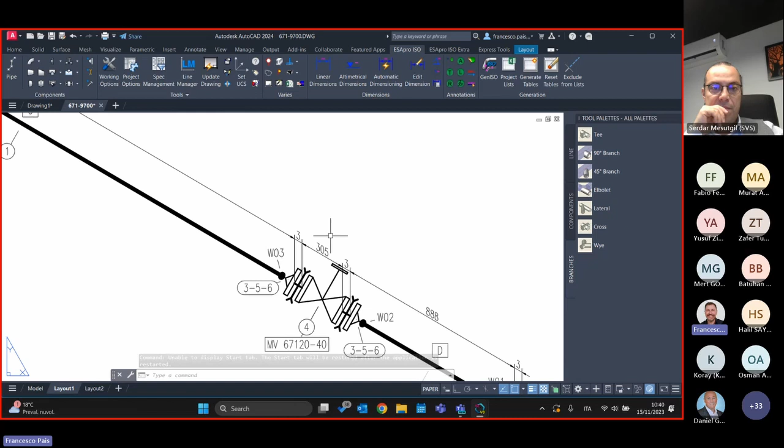This is the ISO. A good thing is this: you can stretch the balloons if you don't like them, or you can arrange your dimensions if you don't like them. This is impossible to do with Isogen, but it's possible with ESAPro. So you can add a dimension, rotate, and adjust or stretch it.

Here you have the bill of materials with the prefabrication materials and the erection materials - they are split.

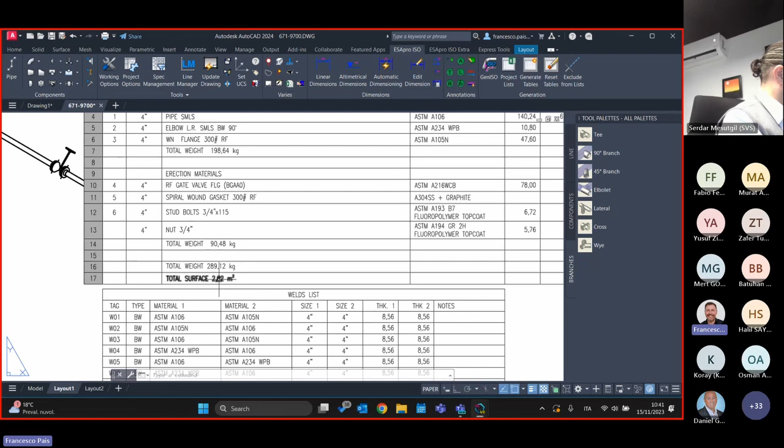And here you have the weights for prefabrications and the erection materials, the total weight overall, and the total surface. You have all the welds list. You have 8 welds, and this is the type, materials, and size. And this is the cut list. You have 4 pipes, and these are the lengths for each pipe.

If you want to keep some erection weld for adjustment, for example here, you can add this symbol. I'm spooling my sketch here, and here you have a pipe A and C that becomes longer. The standard is 257, but if I relaunch the tables, okay, you have 100 more here and there, and you get the final quantities here.

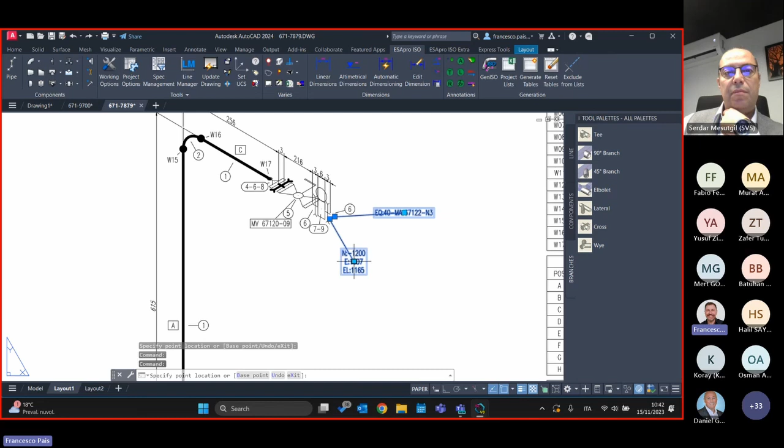And this is for all the ISOs you generate here. So the graphic quality is very good, better than Isogen, but you can improve it. If you need, you may also add a dimension directly from here, because you may add a dimension that is not provided automatically, since the sketch can be improved graphically. This could be very useful, especially if you have complex lines and you want to move the balloons or add new additional infos.

Okay, that's all. We can come back to the presentation. I'll stop my screen sharing, and if you want, we can have a Q&A session, and I'm happy to answer your questions if you have any.